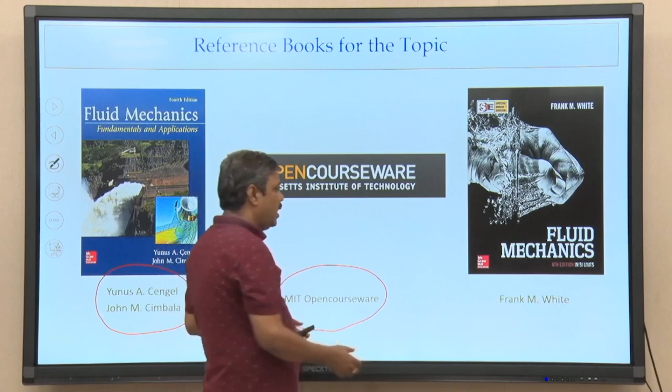I encourage you to look at that MIT courseware. No doubt they have more mathematical components, but if you try to understand the physical concept, look at the Cengel book. An intermediate book is the Frank White book, which considers the mathematical part as well as a series of illustrations and solved example problems.

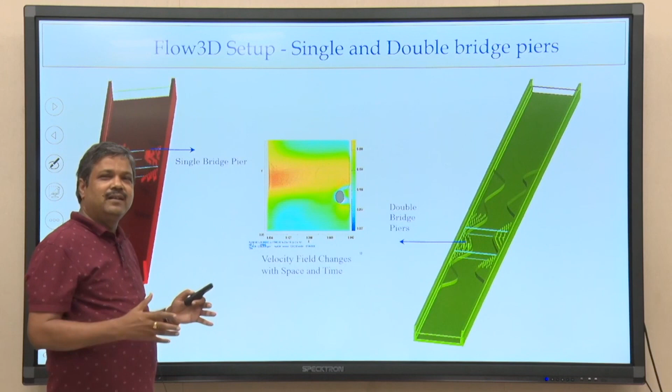Before going to this, let me give a solution sheet for CFD problems, computational fluid dynamics problems, where we have used a CFD software called Flow 3D. We are solving the very basic things I discussed in my first class: the velocity field, the pressure, and the density. That is what we look at to solve the velocity field, the pressure field, and the density field.

When you have these problems, here we have considered a problem with a bridge pier, and here we look at how the velocity field changes, which has a scalar component in three directions.

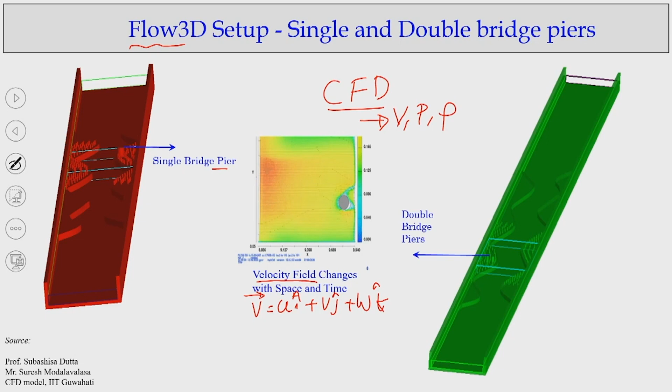Here I am just looking at the Cartesian coordinate system, where I have u, v, w. So this is small u, the scalar component in the x direction of the velocity field, which is a function of space and time.

That is what I tried to introduce in the very beginning classes, to say that the scalar components have these functions of position and time. As it is a Cartesian coordinate system, we define it as x, y, z, and t. It's the same way if you talk about small v, which is the scalar component in the y direction of the velocity field, also a function of x, y, z, t.

So these are all functions we are talking about, and using these computational fluid dynamics tools for a complex flow like flow around a bridge pier, we solve it and get how the velocity fields are changing and how the pressure fields are changing.

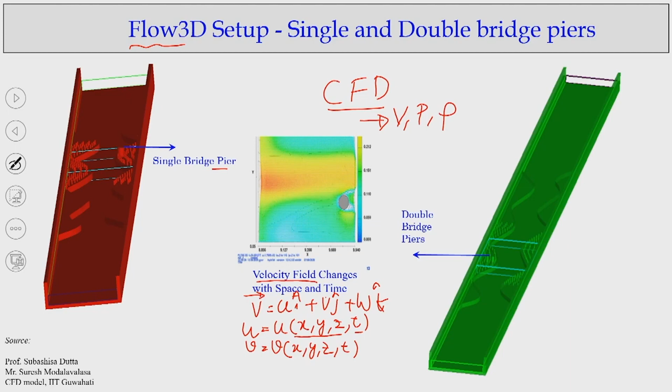I am not going into more detail, but you can understand how the velocity field and the pressure field are changing, which is a function of space and time. We are getting solutions like that.

Now, if I go to the next one, how do we get these computational fluid dynamics solutions? By solving these equations, which are known as the very famous

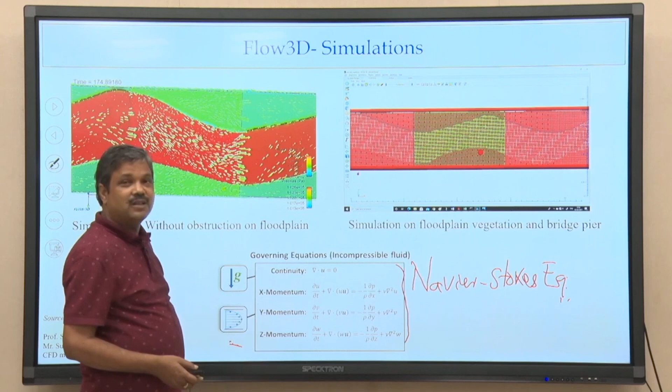Navier-Stokes equations. No doubt it has limitations, which we will discuss in more detail, what type of limitations there are to solve these fluid flow problems. But if you talk about these Navier-Stokes equations, they look like nonlinear partial differential equations, which are functions of u, v, w, the scalar fields, as well as pressure and density.

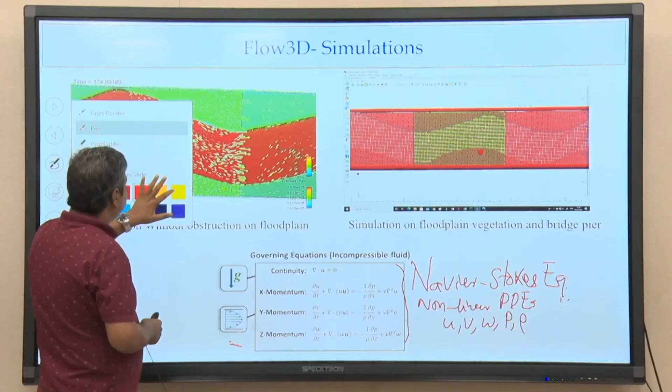That is what the equations are, when you solve the Navier-Stokes equations with certain assumptions, which I am not telling you now, we can solve real life problems to know how the velocity fields are changing. You can see these vectors, and you can see how the grid patterns are there.

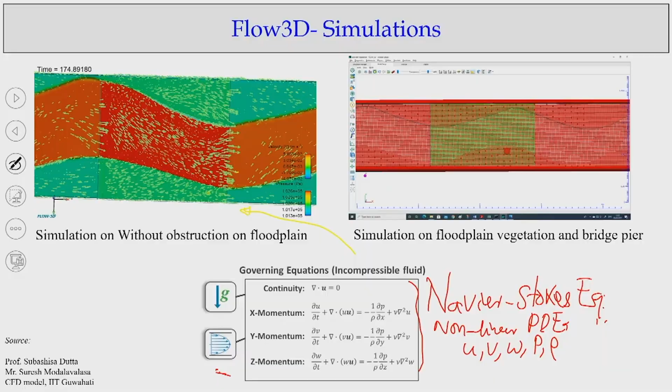So, the solution of Navier-Stokes equations gives us approximate solutions of these problems. That is what is possible today, and that is what has happened in the last three decades. Computational fluid dynamics is a major tool for us to solve many real life fluid structure and environmental problems.

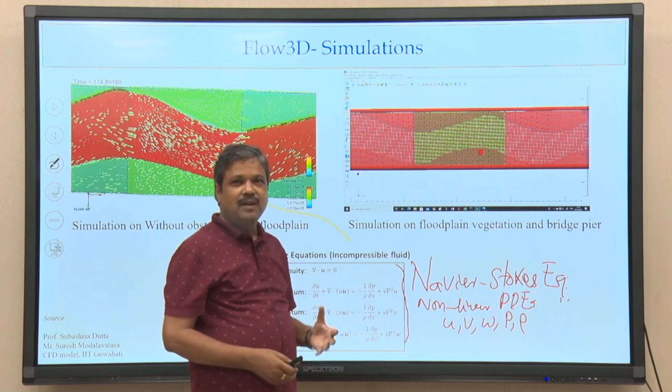Today I will talk about how we can derive these Navier-Stokes equations step by step. Having the knowledge that we have this velocity field, which is a function of space and time, and the density, which is a function of space and time. We also use the continuum hypothesis, meaning we can use these functional behaviors to characterize the flow patterns.

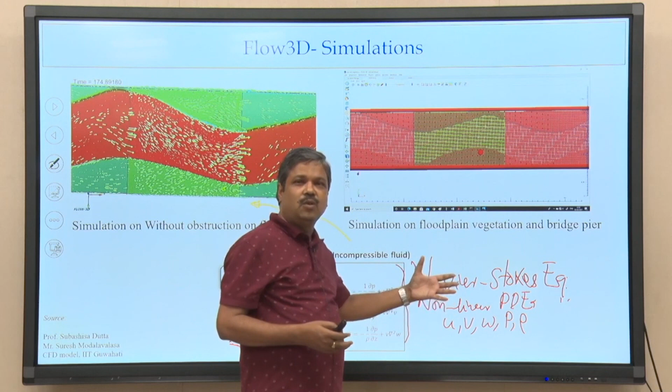Looking at those assumptions, next I will talk today about the great professor Cauchy, way back in 1857, which is almost 200 years back. The equations derived, these are the Cauchy equations, which is what we will talk about today.

I will also talk about stress tensors in fluid flow. In solid mechanics you already know about stress tensors, but today let us talk about stress tensors in fluid flow, and we will also talk about simplified cases when you have

infinitely small control volumes. The idea is, as I said, that I have the functions u, v, w as a scalar field, functions of space and time. If I make infinitely small control volumes where these functions are continuous, then I can use basic Taylor series to solve the problems.

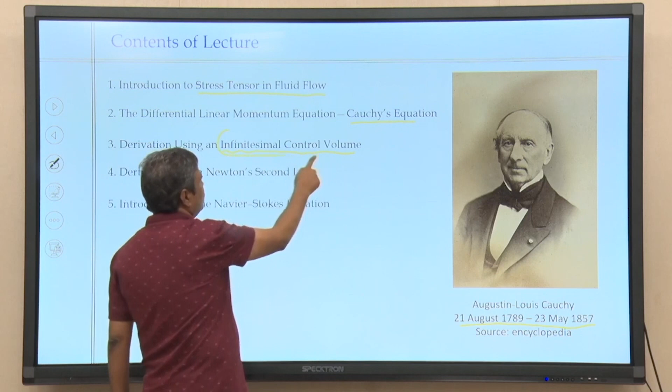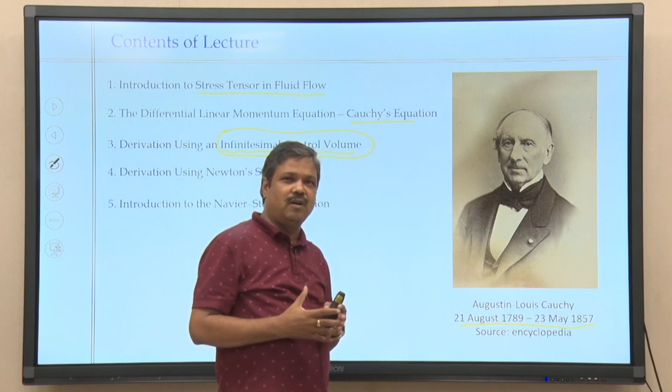That is the very easy concept we will follow: to consider an infinitely smaller control volume, so that we can apply the Taylor series concept to derive the components of mass flux and momentum flux.

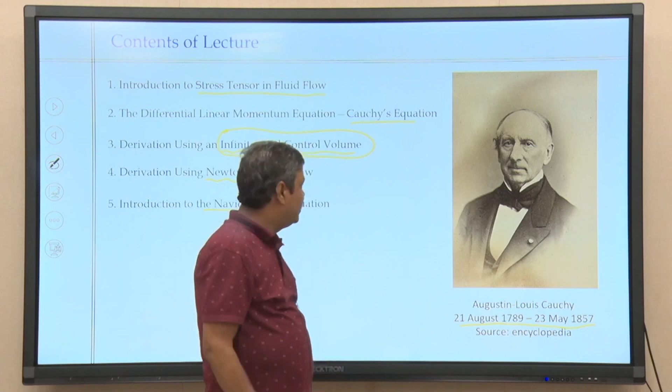The same equations we can look at in terms of Newton's second law, and we will give a very brief introduction at the level of Navier-Stokes equations.

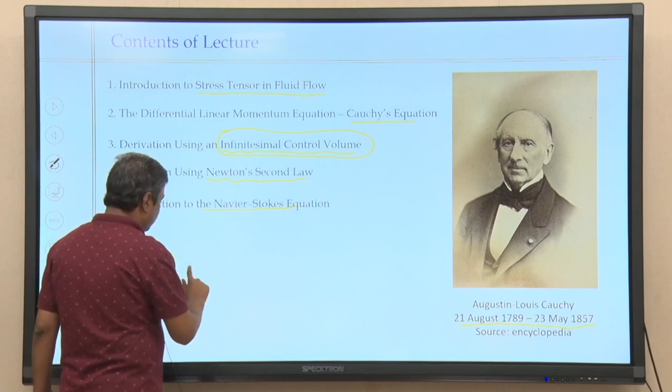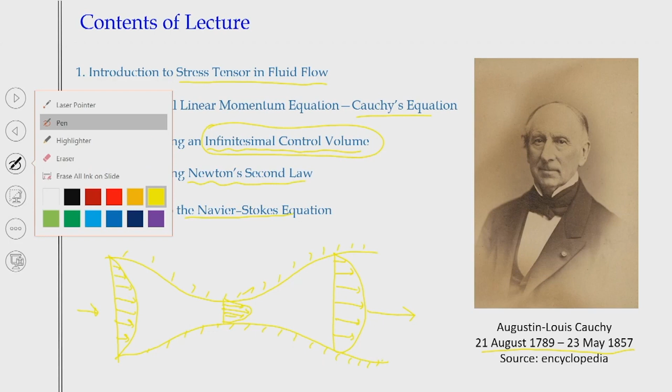We look at it as having small particles, infinitely small particles, and as that is moving, as the velocity distribution changes, deformation happens. There is deformation of the fluid particles.

Maybe linear deformation or shear deformation, because as these particles are moving, it will not be the same, because there is a contraction, there is a change of velocity distribution, so it will have deformations here. Again, if it travels further, it will change the deformation again, having a different deformation.

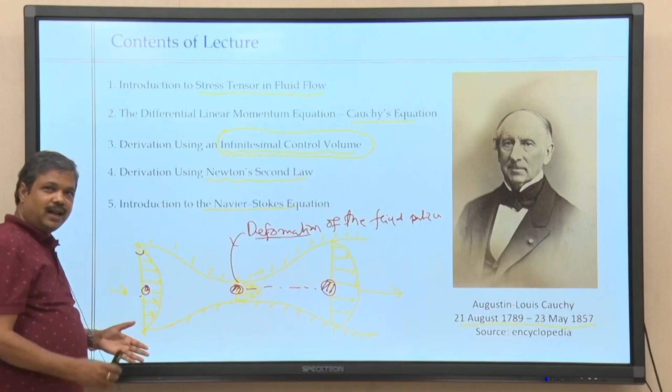That is what I am illustrating with one fluid particle. But if I look at a fluid particle starting from here, as I was explaining, first I told about the velocity distribution anticipated as the flow comes in and goes out, you will have a velocity distribution with no slip conditions, and as it goes you can see there is a change of the velocities.

Because of the change of the velocity field, you can see that the fluid particles will go through different degrees and types of deformation, linear deformations, angular deformations. That is what is going to happen, the deformations, as the fluid particles travel from this direction to that direction.

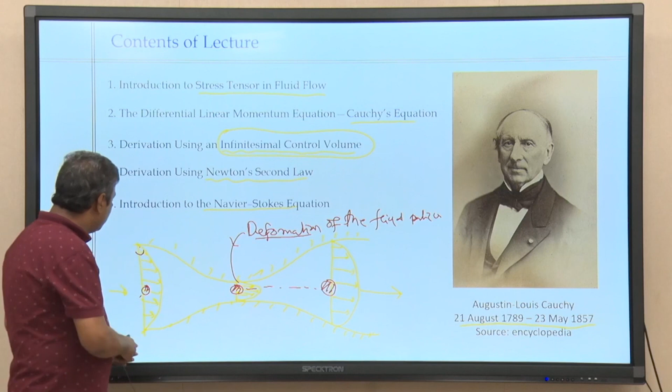Same way, if I consider another fluid particle, it will also go through deformations at different stages. So if I consider n number of fluid particles and conceptually track these fluid particles, how the deformations are happening, that gives me an idea that in a fluid flow, as fluid is moving through, different types of deformations are happening.

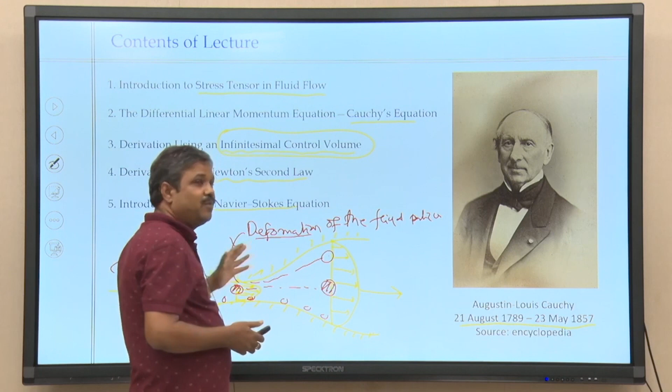Now the concept is coming that we have to conceptually understand. When you have flow systems going on, different types of deformations are happening, as there is a change of velocity distribution, change of pressure distributions, and change of density distributions.

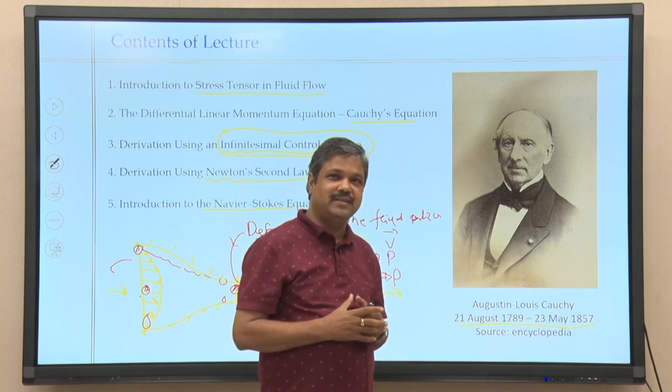Besides that, when there is deformation, as you know from solid mechanics, whenever you apply load on a solid, you will have stress formations. Stress is nothing but internal resistance force per unit area. That is what we define as stress, sigma, that is a resistance.

As you apply load in a solid structure, you see there is stress, internal resistance force per unit area. The same way, when fluid flow is happening, stress occurs at the fluid element level. We are going to talk about the stress component.

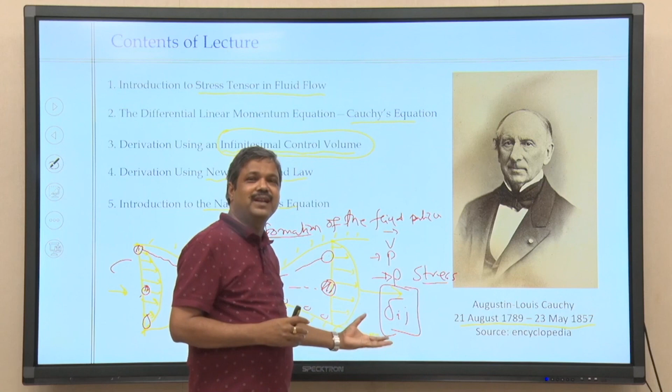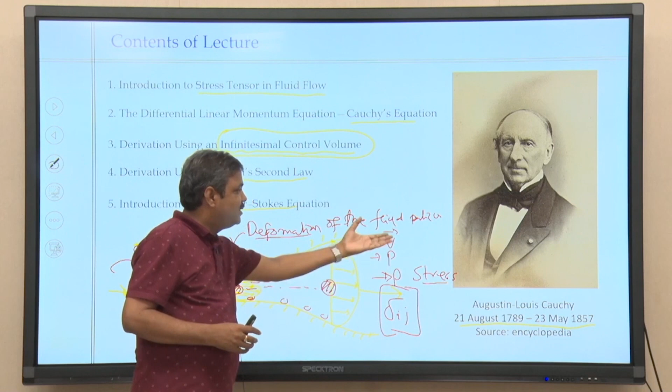This stress component, in case of solid mechanics, is easy to measure, but in fluid mechanics we have to have a conceptual framework to understand it. Whenever there is a flow system, stress development is happening, responsible for changing the deformations as fluid particles move. That will reflect in terms of stress components, velocity, pressure, and density fields. That understanding has to be there in fluid mechanics.

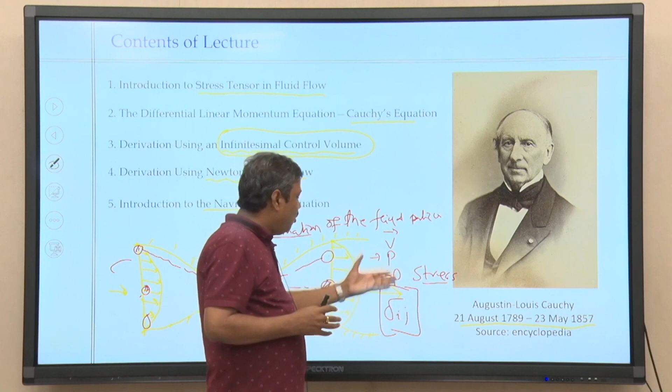Most books represent this in terms of functions which we mix together, and all these functions are interdependent on each other. There isn't a clear cut cause and effect; all are interdependent - the velocity field, the pressure field, the density field and the stress field.

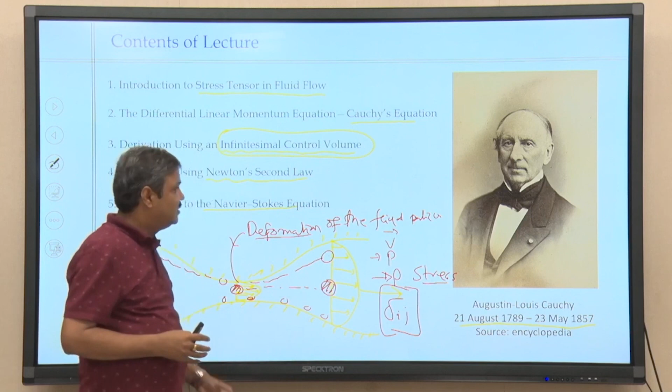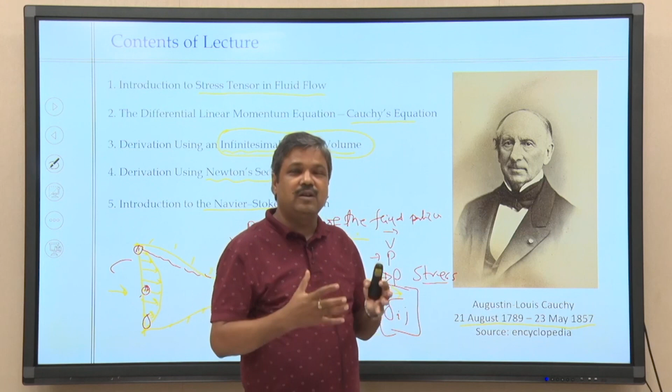Now if you look at the same concept, we talked about the continuum hypothesis, but here we talk about fluid mechanics - how stress happens within the fluid particle levels. As I gave a simple example, whenever you have a boundary and fluid particles are moving, there is a stress component, and that is how deformation happens, there's a stress component on that.

So if you look at it, mathematically many define stress as a tensor and try to define fluid mechanics in terms of tensor calculations, but being undergraduate students I am not going to that level. Let me try to explain it as simply as possible, in terms of stress components.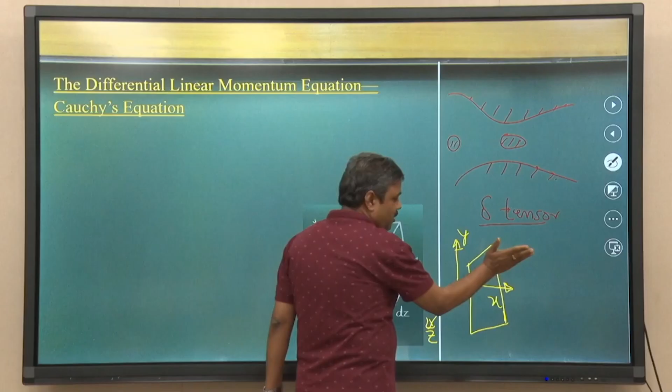So if I define the stress as sigma, the first subscript indicates it's acting on a plane which has perpendicularity in the x direction. The second subscript shows the direction of the stress component. Any stress tensor we define with two subscripts - one showing the plane direction, the second subscript showing the stress direction.

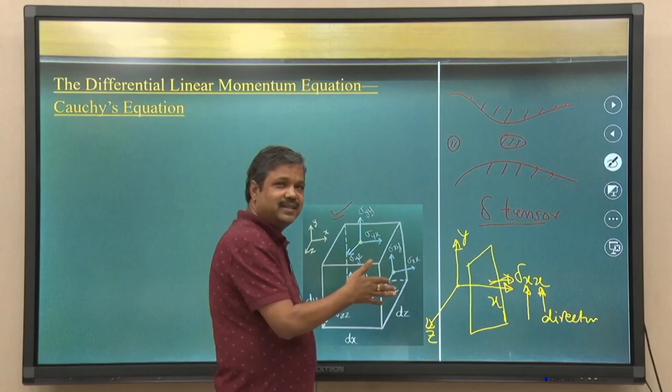The first subscript shows on which plane the stress acts, that is, the direction of the perpendicular normal vector to that plane. If that perpendicular follows the x direction, that is the plane surface indicator.

So if I have sigma x x, that is acting on the x plane. When I write the same thing acting on the same plane but in the y direction, it becomes sigma x y. If I take the z direction, I write sigma x z.

The same way, if I take a surface in terms of x, y and z, please remember these in terms of subscript notation. You should not be confused here about what is sigma x x, what is sigma x y, what is sigma x z.

The same way, if I consider a plane surface, in this plane I will put it as the functions. This is the y plane, this is the z plane. I am considering a plane surface which is parallel to the x-z plane, and I get this component.

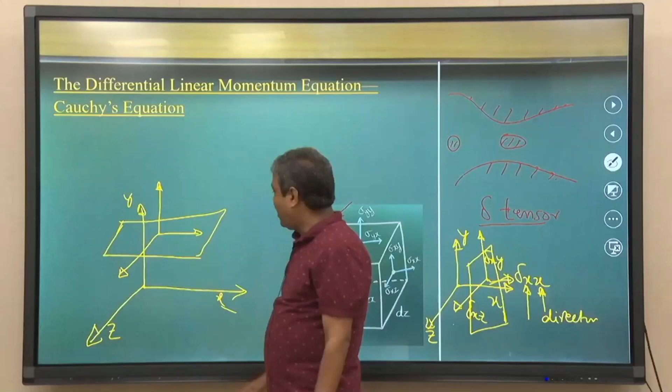Now I can ask my students to tell me what these components are. So for this x plane, we get sigma x x, sigma x y, sigma x z.

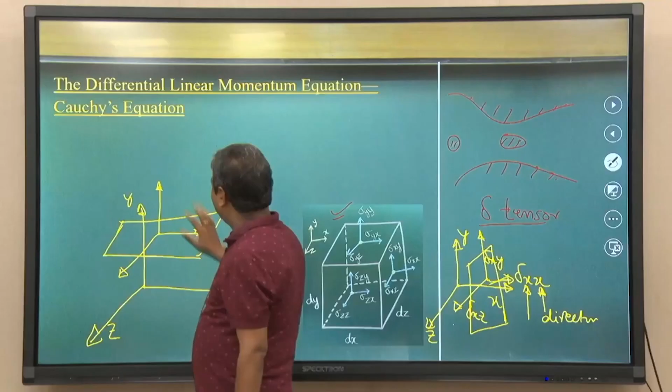Now if I ask the students in this class what this sigma will be - yes, this is the y plane, so sigma y y. What will be these other components? Sigma y x, and this will be sigma y z, exactly the same way.

If you look at it, these components are written like this. Now, to understand this, stress is nothing else but the internal resistance force per unit area. That is what we are defining as the stress components, the internal resistance force happening.

I have considered a small, infinitely small control volume, and in that I am defining the stress field. What do I mean by that? I am defining the internal resistance force per unit area, because it is easy for me to derive it. That is the reason we talk about stress.

But indirectly, for this infinitesimally small control volume with dimensions dx, dy and dz, over this surface I am defining what internal resistance forces exist per unit area. That is the reason I am talking about the stress field. Please remember, we are talking about force per unit area.

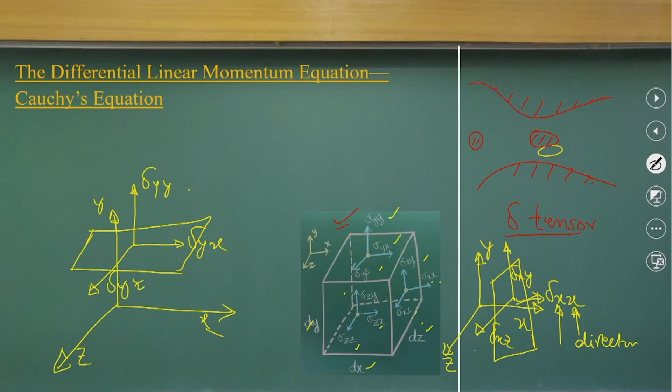We are making it an internal flow resistance force, Fn, as n number of fluid particles are traveling, there will definitely be a resistance part. That is shown here. The resistance per unit area as stress components, for a Cartesian coordinate system, I can define the stress components - that means I can have a stress tensor.

Let me write the stress tensor. So if I write the stress tensor, sigma is the stress tensor. I can define it as a matrix, a 3 by 3 matrix for this smaller control volume, with components sigma x x, sigma x y, sigma x z.

The same way here I can write y x, and it will be z x. This way, sigma y y and y z, and here will be z y and sigma z z.

So if you look at this stress tensor, it is nothing else - again I am repeating - than internal resistance force per unit area, that is the force components. Per unit area we are defining it, which may have 9 components.

Sigma x x, sigma x y, x z - that means it is acting on the plane surface which is perpendicular to the x direction, that means the y-z plane, in the direction of x, y and z. The same way it happens for the others.

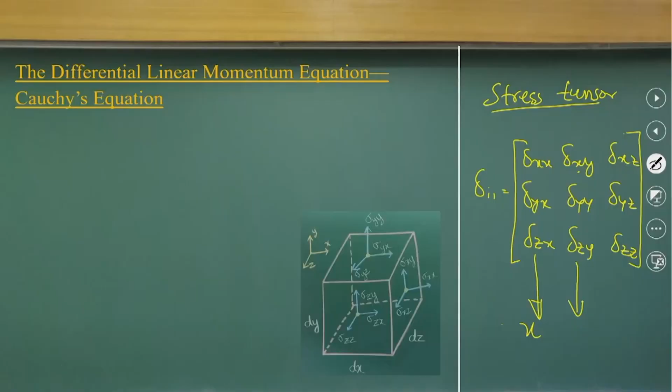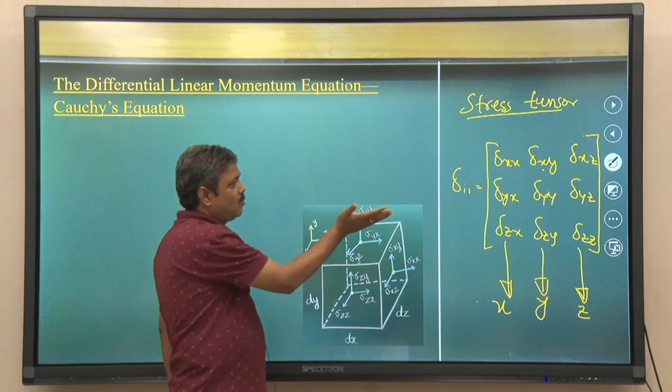If I try to interpret this, all these internal resistance forces acting along the x direction have components x x, y x and z x. This is acting in the x direction, this in the y direction, this on the z direction, and this is acting on the y-z plane, with directions normal to that.

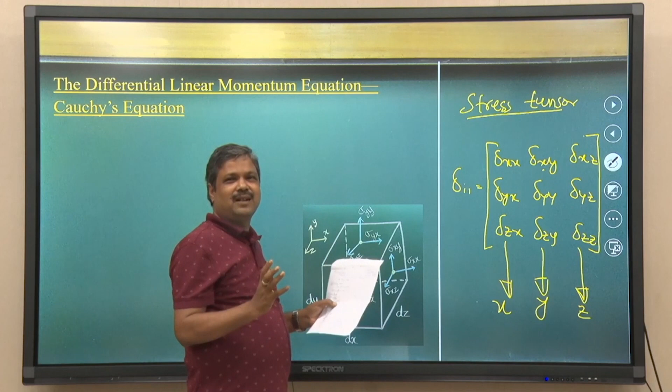So if you look at these equations as stress tensors representing internal resistance force per unit area, we are not doing great mathematics - we are just equating some force components at an infinitely small control volume, where we can apply the Taylor series and basic vector calculations, nothing else.

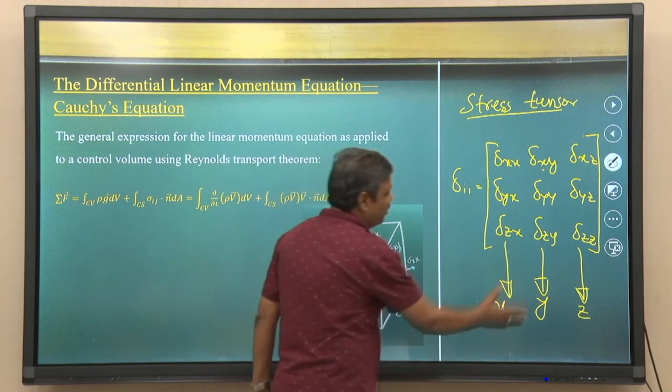Let me go for the next one. Please do not have a fear about these terminologies and the control volumes. When you want to write in differential equation format, the control volume has to be infinitely small - that is the idea. That is the reason you can get the velocity field, the pressure field, and the density field.

Now, as we discussed, applying the Reynolds transport theorem with B value as momentum gives the linear momentum equations. So, mass into velocity - when you apply it, I will get the same form as discussed in Reynolds transport theorem.

The sum of the forces is going to equal the rate of change of momentum within the control volume, plus the net outflux of momentum passing through the control surface. This is the Reynolds transport theorem, as we discussed in more detail earlier.

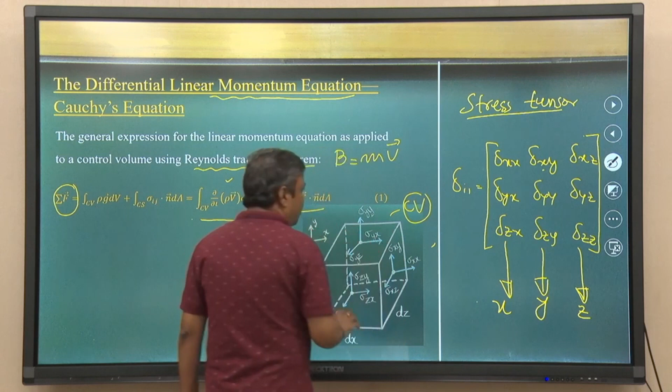Now, what is the basic difference we have? When I consider a smaller control volume like this, on which there are the stress tensors - already defined as force per unit area - that is what we can call the surface force component.

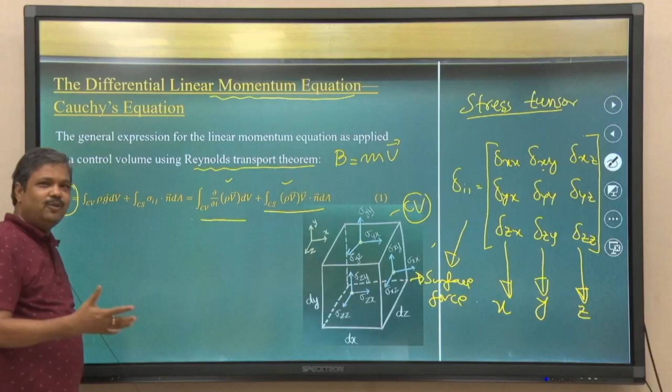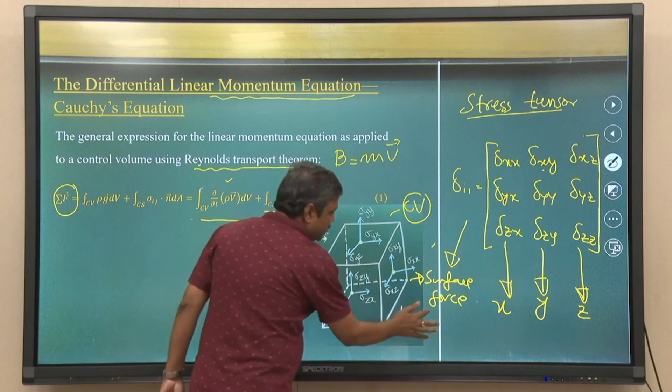If I multiply the stress with area, I will get the internal resistance force component acting on the control volume - an infinitely small control volume - which gives the surface force component.

Besides that, I need the body force component, where you just consider the weight of this infinitely small control volume. The force acting here will have the body force and the surface force.

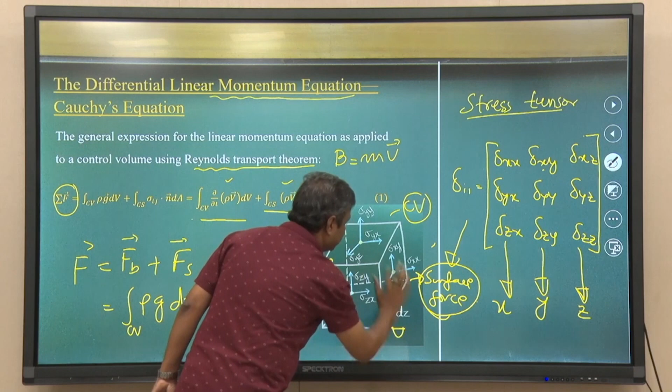This is the same as we discussed in Reynolds transport theorem using the integral approach. The only difference is the body force, which we compute as a volume integral of rho times g dV, where V is the volume. V-star is the volume of this control volume, dx dy dz - it's a parallelepiped, so you can find the volume as dx dy dz, integrating over the body force part.

What is the surface force? Very simple - it is the integral of sigma-ij dotted with n, dA. This is nothing else, as I tried to show, don't be afraid - the same equations we apply for infinitely small control volumes, where the stress field as we defined it, stress into area, gives the surface force. Here we use a dot product because we're not assuming the x, y, z plane with coordinate axes, so it's a general format.

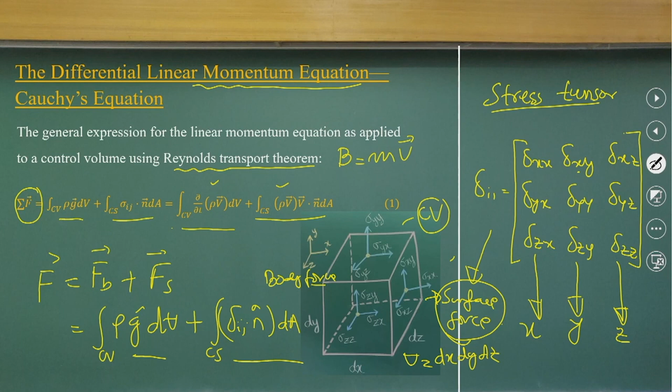So we get the surface force, and this is the gravity force - g can also be represented as vector components. So the force components we get are: one is gravity force, which is the body force, and the other is the surface force.

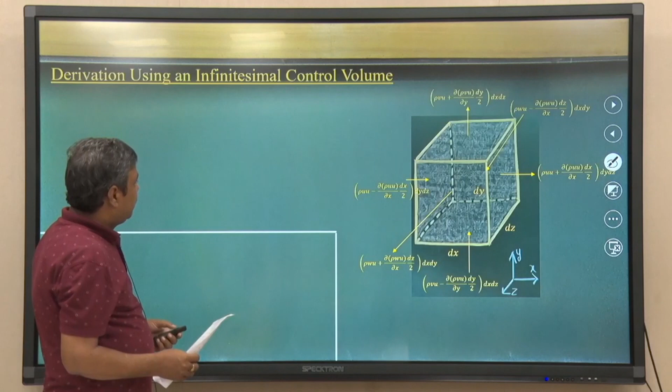Now let's look at the next part. If you look at these control volumes, before going further - if I take any stress component sigma-xx, please remember they are also functions of space and time. So we can use the Taylor series and continuum hypothesis to consider the stress components also as functions of space and time.

Now, if you look at the control surface, I'm just looking at this component, how it comes. For a control volume that is very large, I can find the momentum flux and the correction factor for it. As I convert this control volume into an infinitely small control volume, now the control volume is no longer a bigger control volume - it's an infinitely small control volume.

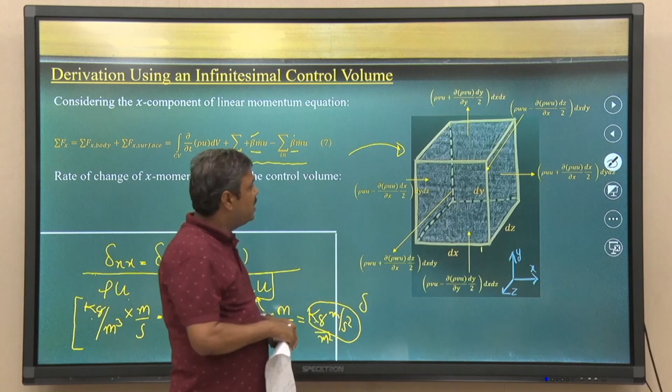Same way you can write rho uu, rho uv, rho vu, rho wu, all of which are nothing else but force per unit area, happening because momentum flux is going in the x direction due to mass flux, in the y direction due to mass flux, in the z direction due to mass flux. So try to understand that when you have an infinitely small control volume, your mass flux is coming in 3 directions, and momentum flux is in 9 directions, in 3 dimensions.

So if you compute it, it will have 9 components, equivalent to force per unit area.

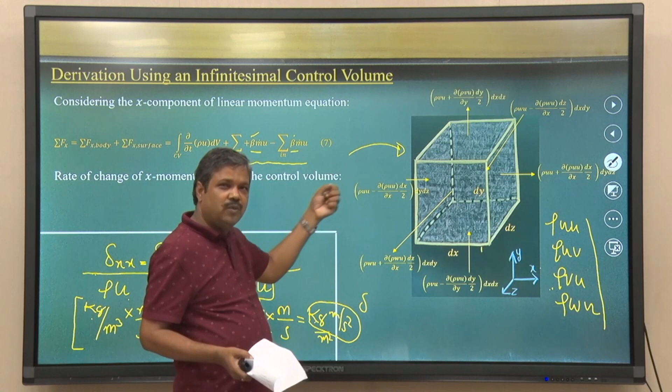Remember, stress is internal resistance per unit area. Same way, with the rho u components, we can physically interpret it. It is nothing but momentum flux per unit area, an equivalent force happening because the momentum of the fluid flow is coming into or going out from this control volume. How much momentum flux is coming in, going out from this control volume.

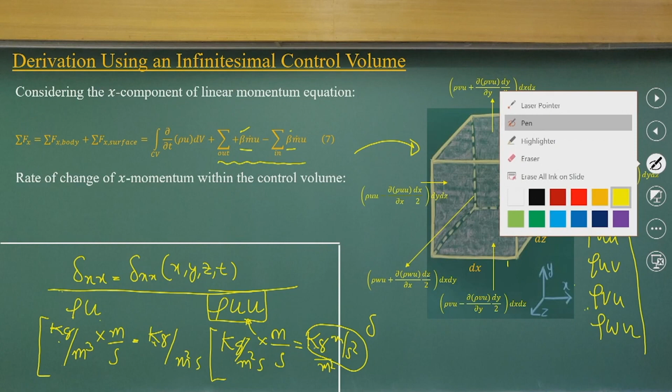Now if I take an infinitely small control volume, I know my rho uu, rho uv, rho uw, I have 9 components as the momentum flux per unit area. If I define the function behavior at this point, rho uu, let me just put this in one dimension.

Taking these two surfaces, my rho uu is at this point, which is a function of space and time. If I look at a distance dx by 2 in my x direction, using the first Taylor series approximation, what I will get at this surface will be rho uu plus, since this is a function.

The first derivative into dx by 2, the distance is dx by 2, and my x direction is positive in this direction. If I compute here, this will be rho uu minus del by del x of rho uu, dx by 2.

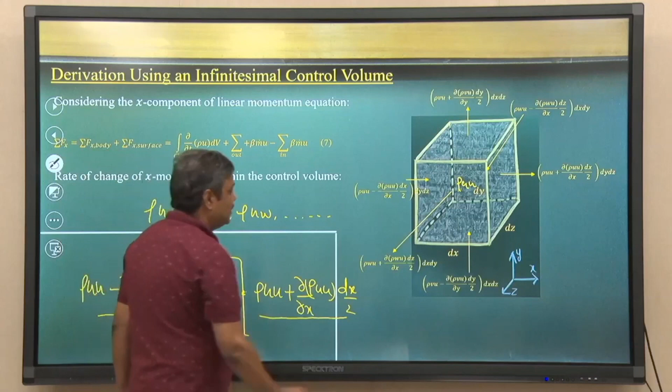And if I look at the net, just subtracting this along this, the momentum flux per unit area, that is what you are doing per unit area.

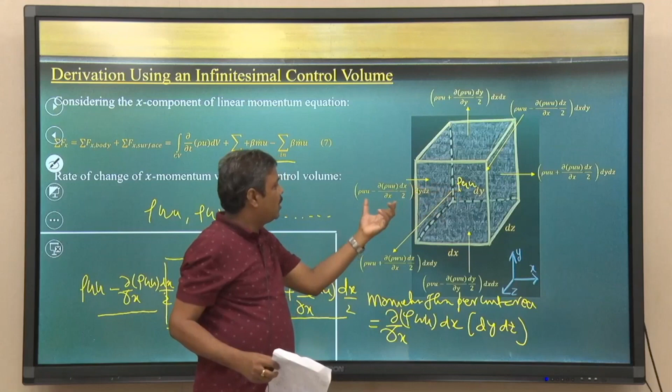So as earlier in classes, we tried to simplify these terms. Now we are trying to write these terms in terms of momentum flux as defined by rho u. What will be the component here, and here, and in these directions, because rho v is a mass flux, similarly rho w is a mass flux. When it comes in the u direction, that momentum flux is represented. The rho v is a mass flux coming in, which has velocity components causing the momentum flux into this control volume, and similarly going out.

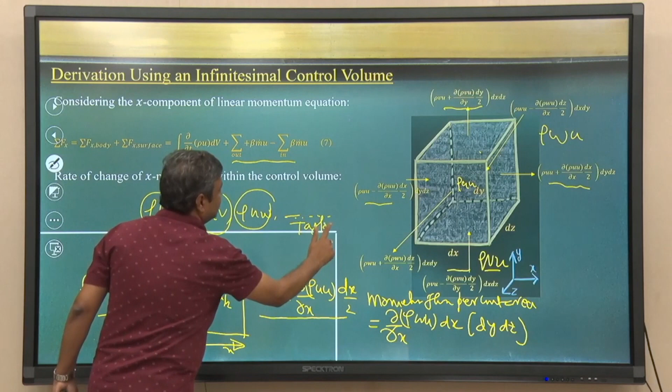So if you look at the derivation, it is very simple, not complicated. The only thing is they assume all these functions are continuous, and they use Taylor series approximations for this. You can get the net momentum flux per unit area just by subtracting for each direction, x direction with a different part. More detail you can look up in a book, but this is the basic concept.

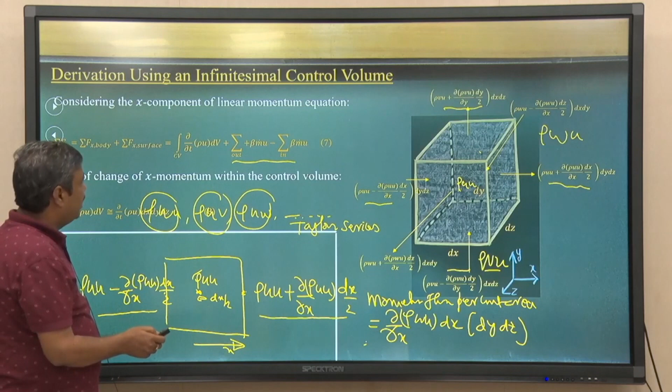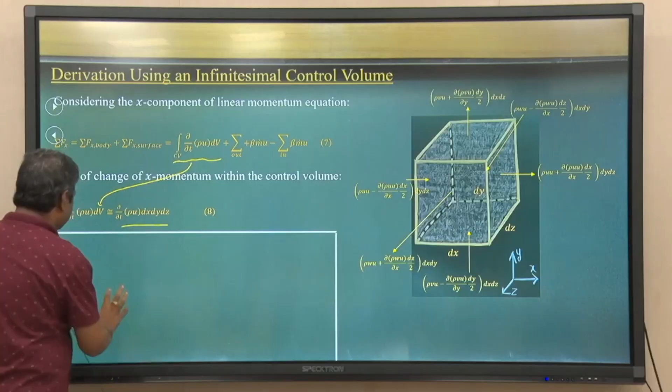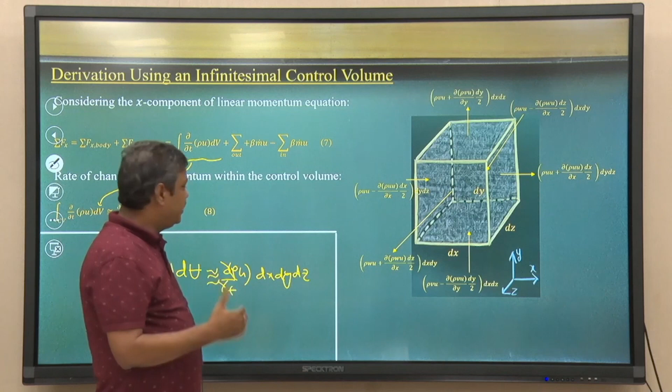Now if you look at another component, let me highlight here, since it is infinitely small we can approximate these. I am writing rho v, the change of rho u components in dv, which we can approximate because for smaller control volumes, dv will be dx dy dz. We can approximate this as rho u, since it's a smaller control volume, the variations within it are not significant. So you can take these functions out and write the answer. Basically you need to understand how the approximations are done in deriving these Cauchy equations.

Now if you look at how I derived these things, we can get the components as I was deriving for the x direction. Same way you can do it for the directions of v mass flux in the y direction, z direction, the sum of the surface momentum flux components.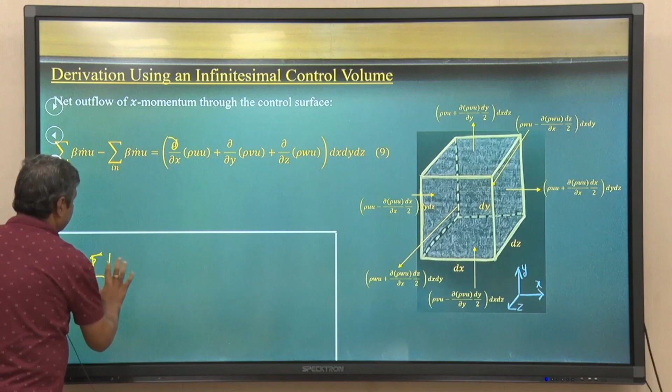This is defining outflow and inflow, the same concept. If you look at this, it's the same concept, that is what will give del by del x of rho u, plus rho u into u, plus, same way I am writing rho v u, rho w u, this is the volume of the control volume.

Now, d by dx gives the change of these functions along the x direction, this is the change of functions in the y direction, change of function in the z direction. That is what we are looking at. The momentum flux, how it changes in the x direction, that gives the net force as equivalent force components.

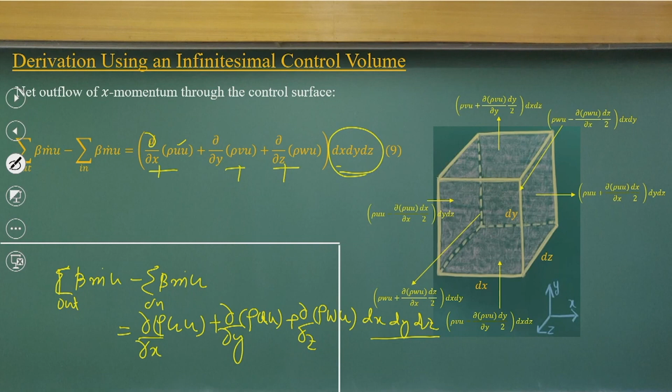We get this by physically interpreting the force components, because of net momentum flux coming in - the fluid particles are coming in and going out, causing momentum flux in and out of the control volume. These components we derive as gradients in the x, y, z directions, showing the force components acting on this, because of the momentum flux going in per unit volume, which is why dV is there.

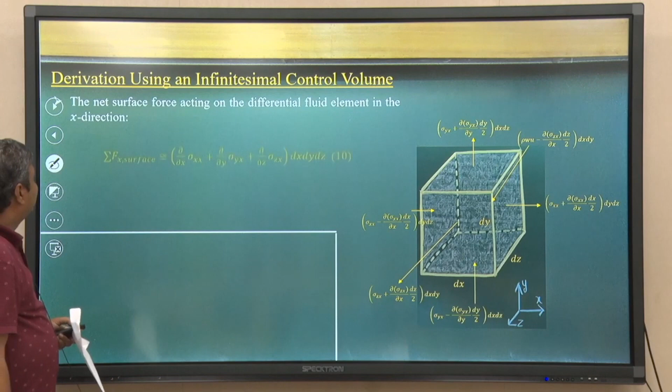Now if you look at the next slides, what we are looking at is applying the same concept for all these directions.

Now let's look just at the stress field. Again, I consider sigma x x as a stress which is a function of space and time, and I can use Taylor series to approximate how the sigma x x variability will be there.

Same way as I did it for momentum flux, this is nothing else. If this is the value at the center, what will happen at a surface which is dx by 2 distance away, that is what will come at this part, multiplied with the area, giving a force component.

Same way, I can find the force component on other directions on this surface and that surface. Same way, you can have a sigma y x component, sigma z x component. I told you sigma x x, sigma y x, sigma z x all are acting in the x direction.

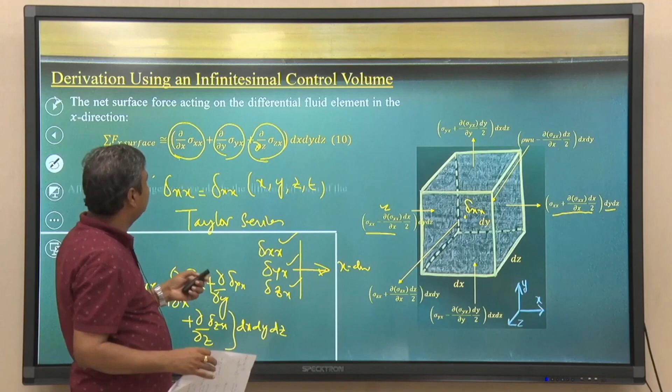As we have computed the momentum flux, surface force components and gravity force components, now it is quite easy for us to write the basic equation that comes in the x momentum direction. The equation comes like this.

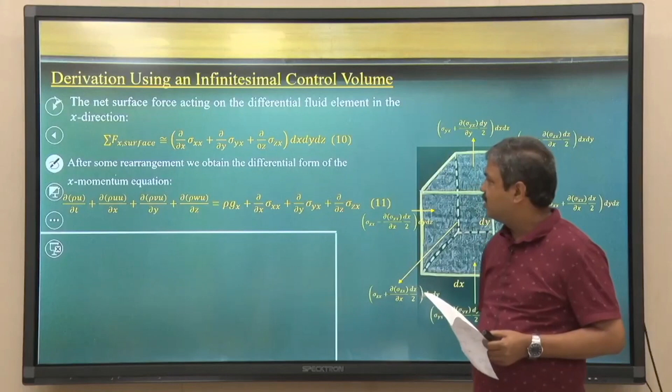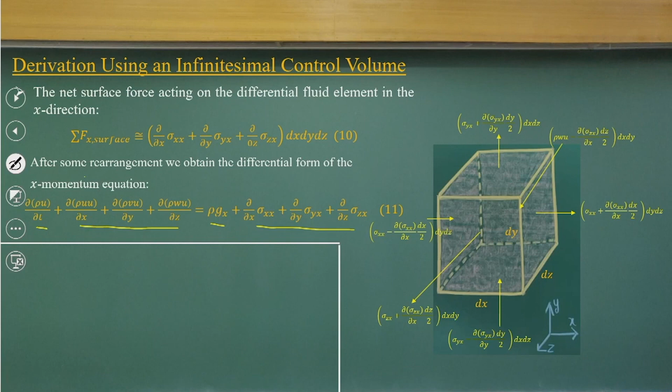If I equate the components I am getting for the body force and surface force components, this is the net outflux of momentum flux in the x direction per unit volume. This is the net change of momentum flux storage within the control volume with respect to time. In partial differential equation format, I get all these components equating the momentum flux, the change of storage of momentum flux, the body force and the surface force.

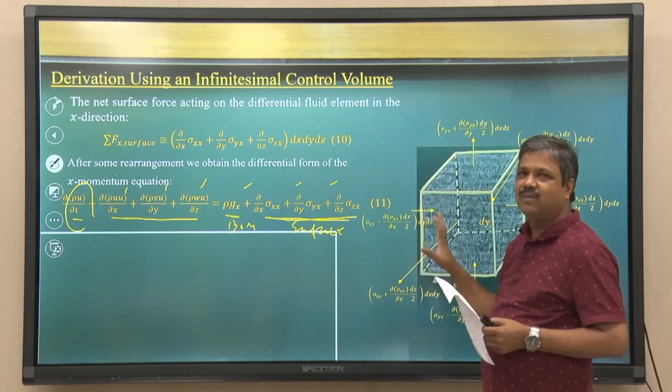So as we did it for the integral concept using Reynolds transport theorem, the same we are now looking at in differential equation format. The derivation is the same, with certain assumptions as I explained, that these are all functions and Taylor series with appropriate control volumes. Considering that, we get the x momentum equation like this.

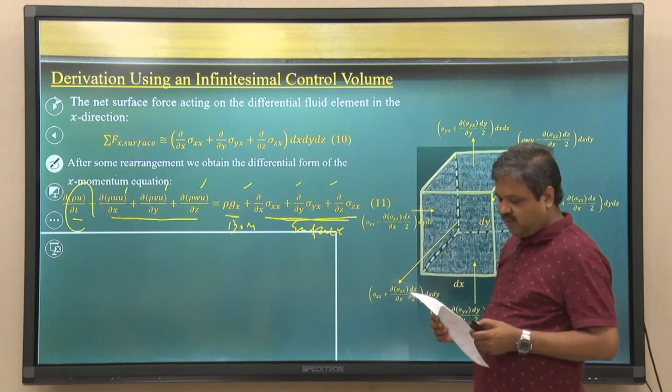So you can understand, these are all force components, and we are splitting and looking at the force per unit volume of all these terms. Now in the y direction and z direction we get the equations in a similar format.

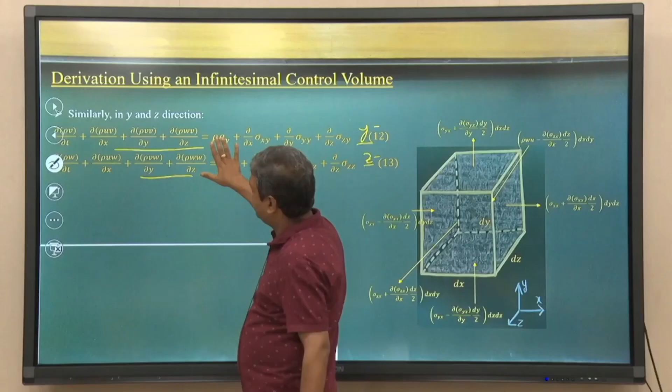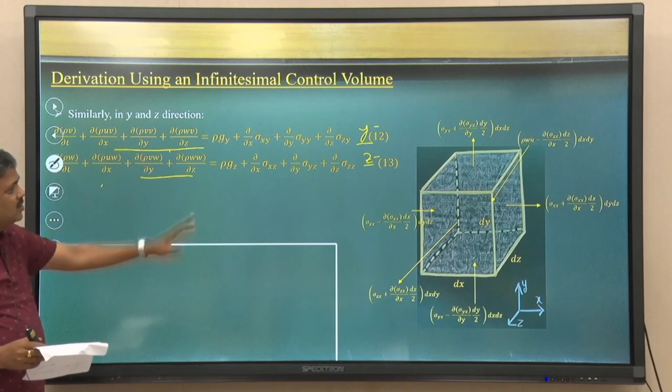This is for the y direction, this is for the z direction. So we now have three equations from Reynolds transport theorem applied for x, y and z directions, representing this momentum flux in each component. This is because of the stress field, this because of the body force component, this because of momentum flux, and this because of the change of momentum storage within the control volume with respect to time. That is the summation we are doing.

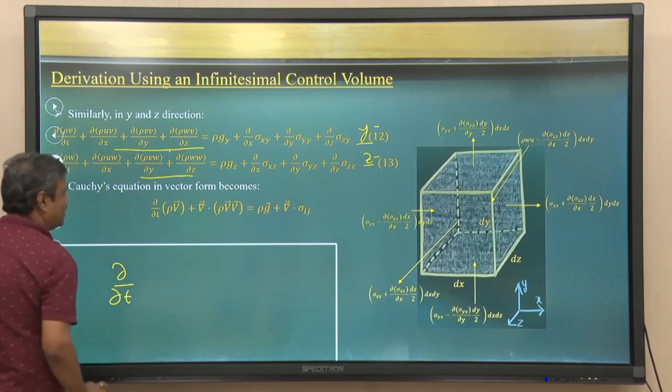Now if I look at a very basic vector form which can easily interpret this, I can write the equation in vector form because it is easier to remember compared to these three equations. You have rho g as a vector, and sigma i j as components, you take the dot product to get the stress term. This is the body force component, again I am repeating it.

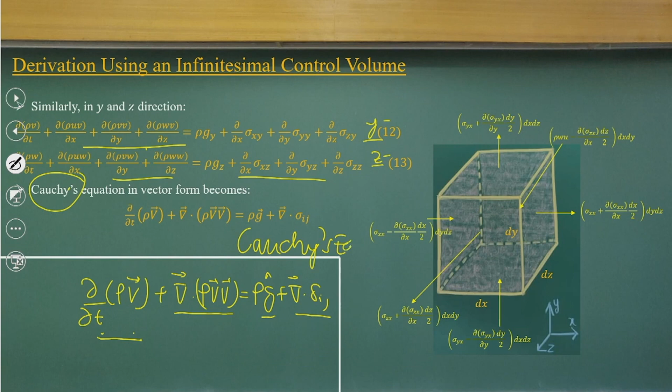This nonlinear term you can also expand, giving rho v v, and the change of momentum flux within the control volume with respect to time. This is the Cauchy equation, C-A-U-C-H-Y, which was derived almost 200 years back.

I think with this, let us conclude. Today we will conclude this.